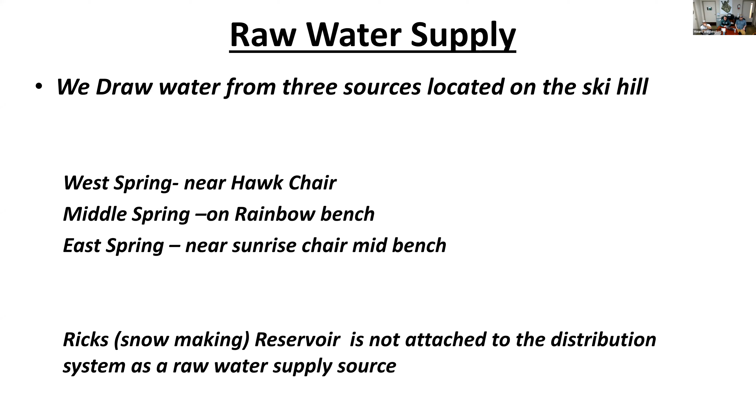For treatment, we currently UV treat and chlorinate our water prior to it being stored in our treated water storage tank. The treated water storage tank has a capacity of 500,000 gallons. During normal operation, the tank level is kept between 29.5 and 28.5 feet, with total tank height of 30 feet, so it only varies by approximately 1 foot during operations. Once it hits 28.5, the pumps kick back on and top it back up to 29.5 feet.

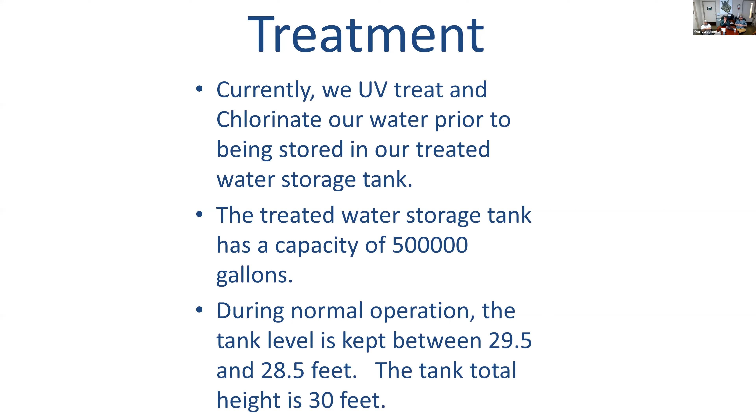So here's a map of our distribution system. You can see in the upper right-hand corner, that's the treated water storage tank, which is located just right beside the Marmot recovery facility. The blue lines trace the way the water will flow down through the resort.

As we're a gravity-based system, it starts at the top. It comes around the front of the Bear and Deer Lodge to the main lodge, but there's also a branch that spreads down and goes towards the general store and then feeds in through Dugan's lot into 799.

Those two lines pass through 799 with some spurs going out, making its way down towards Paradise Lodge, transmits directly down to Nordic Road, and then branches off both to the Raven Lodge and towards Beaufort Heights subdivision.

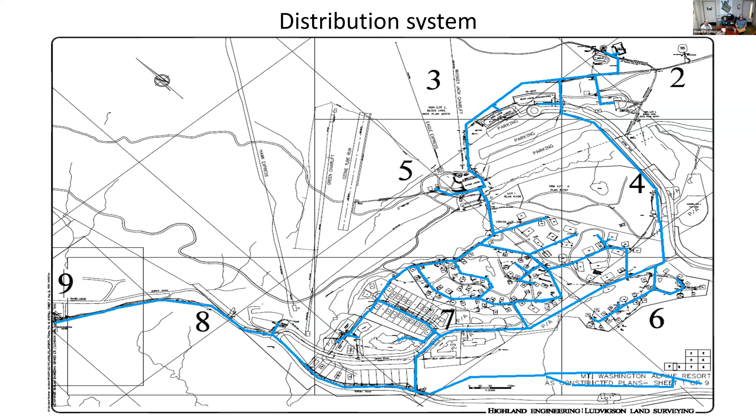So we're going to have a quick look at what we were experiencing for normal operations last year, and these are trending shots between November 16th and January 9th, 2021 that we're going to look through.

It's important to note in this slide that it's basically November 16th to December 1st. You can see the yellow lines are pump cycles, when the pumps kick on and off. The red line up top is the height of the treated water storage tank, varying up and down throughout the day. You can see the purple line, the middle spring line, how evenly it is. At this point, it's steady, sitting at about 67 inches deep right now in this shot.

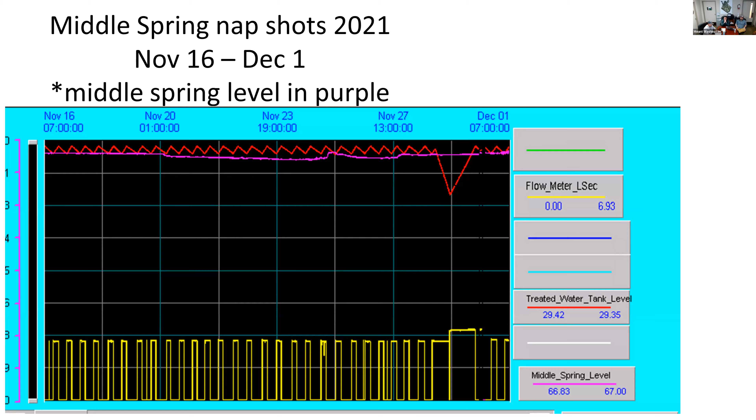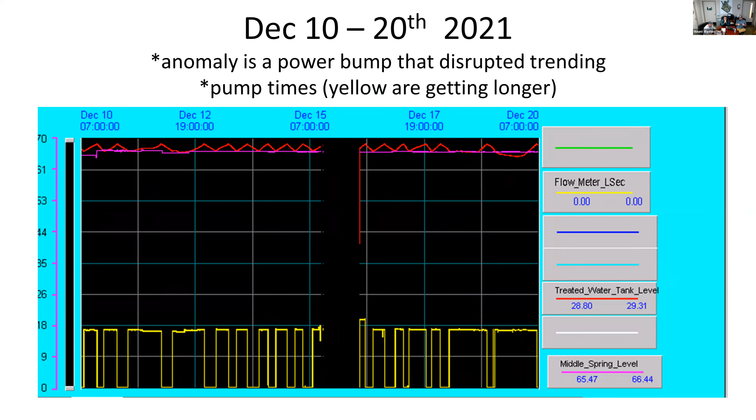December 10th to the 20th. Now you can see this is where the resort started to pick up pace as we're getting busier. You can see the pump cycles are actually longer, quite visibly longer. The treated water storage tank height varies. You can see the weekend dips as it goes down, and then it climbs back up over the nights, and drops down during the day, and we go through that cycle. That happens pretty normally.

This slide is December 20th through the 30th, 2021. This is the start of our main Christmas season. You can see the pump cycles are really long. The tank drops down and then it recovers overnight. What's important to note is that even though we started pumping 24 hours a day on December 26th, which you can see by the yellow line on the right-hand side of the graph, that's just a solid line going across, indicating we are pumping.

We started on the 26th and stopped on, I believe, January 9th, which would be the next slide. But go back, please. It's important to note here that the middle spring level is consistent. You can see all the way across that the height doesn't change.

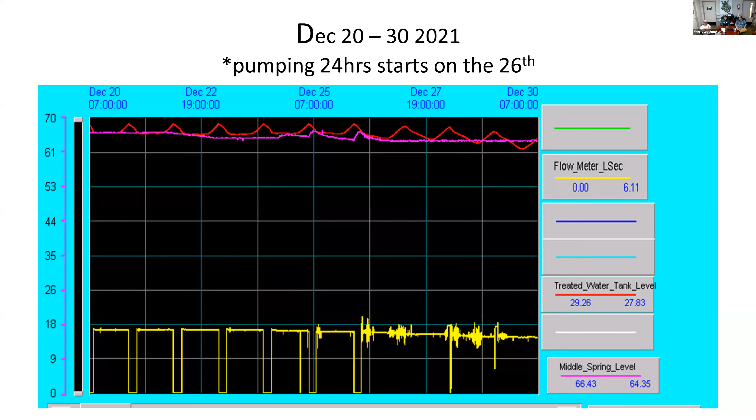So here we are, this is December 30th through January 9th, 2022. We have to notice that even though we are pumping 24 hours straight during this period, the middle spring stays level, all the way across. But what you can notice is the fluctuation in the treated water storage tank. During the day, you'll see the drawdowns, and the spikes up are an overnight fill. That pattern continues, and the tank got down to a low of approximately 25 feet during this period, which isn't uncommon for a busy resort. We're pumping 24 hours a day, straight through that week.

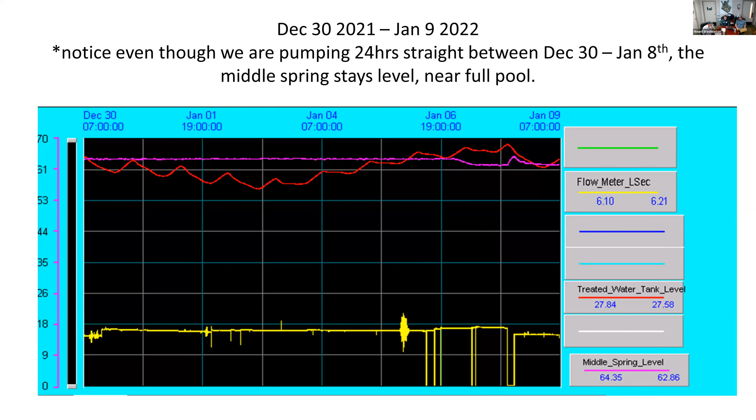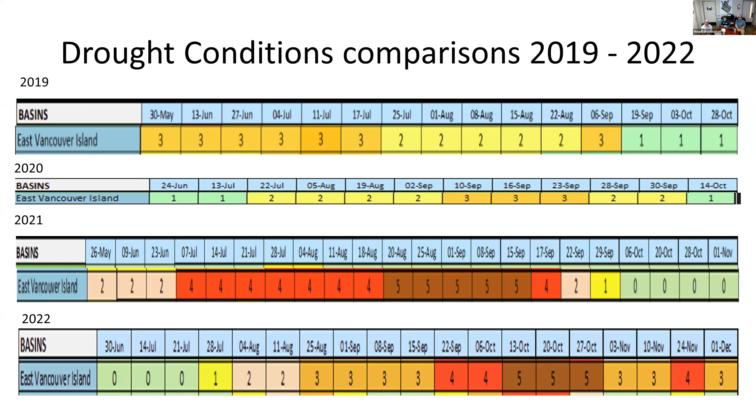So we're going to have a look at some operations from September 16th this year forward. This is what the concern was that caused a lot of issues for us.

On November 16th, we really noticed that the basin, you can see on the far left side of the chart, wasn't recovering between its pump cycles. It doesn't peak out above or equal to where it was. So what we did is we moved some water that we had in the East Spring that we could take, and we were able to pull a partial fill from it, which allowed the middle spring to start to recover. You can still see the line bouncing up and down, troubling, but it's still within a normal pattern.

But on the 21st, you can see around the 20th, 21st, that pattern changes dramatically, where the refill rate after a pump cycle was not strong enough. So essentially, what we were pumping into the distribution system was way more than we were being recharged in our raw water sources. On the 21st, we actually contacted Island Health to discuss this with them, and immediately following that, we started looking for alternate sources that we could pump from. While we're doing that, you can see where we're getting alternate sources approved. You can still see the downward trend of the height of the middle spring, and that's important to notice because that's not usual from what we normally see.

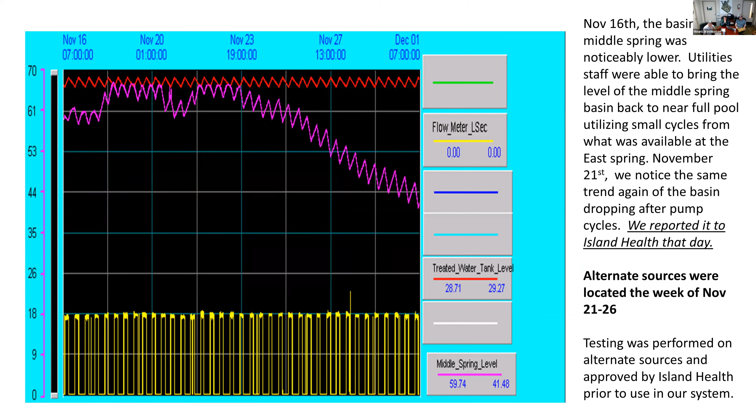So this is December 1st through 13th, 2022. The screenshot was actually taken this morning. On this chart, you can see right after December 4th, the next line forward is December 5th. It was in that period that we got the okay from Island Health to use the water from that alternate source. It took time for the test to be approved and then the okay to be given by our health officer to use that water in our distribution system.

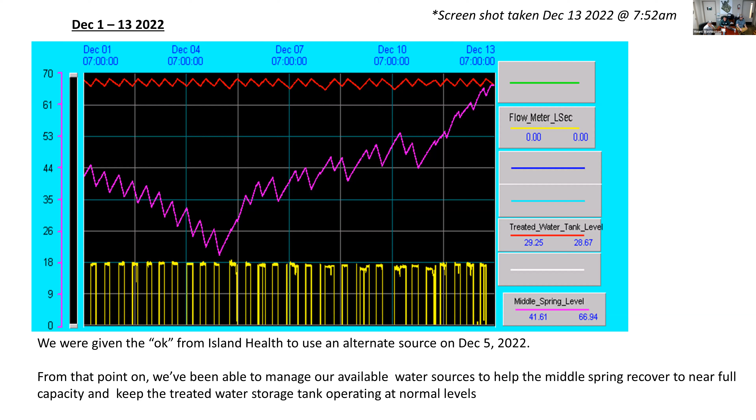Once we had that approval, we were able to supplement the middle spring, or sorry, the East Spring water with this alternate source, and we were able to give the middle spring a break per se. You can see how much we started to climb. So this week we've been diligently at it, making sure that the middle spring is still climbing. We wanted to reach as much water as we could in that source prior to the Christmas break starting.

So here's some resort usage numbers in comparison.

Now on the left is 2021 November. You can see the average usage isn't very high. There's an anomaly at the bottom where we had a water line break on November 30th at unit 94, and that's why there's high consumption on those two days. But you can still see how low the consumption is at normal, throughout the month. And yes, those numbers are cubic meters of water.

Then as we go through the month of December, you can see the usage starting to increase. What's highlighted in those Excel spreadsheet numbers, the 26th to the 9th, is the period at which we will pump 24 hours, and that's what we cannot do this year. We cannot have 24-hour pumping cycles for multiple days in a row, so that's what we're trying to avoid through water conservation and ongoing efforts right now.

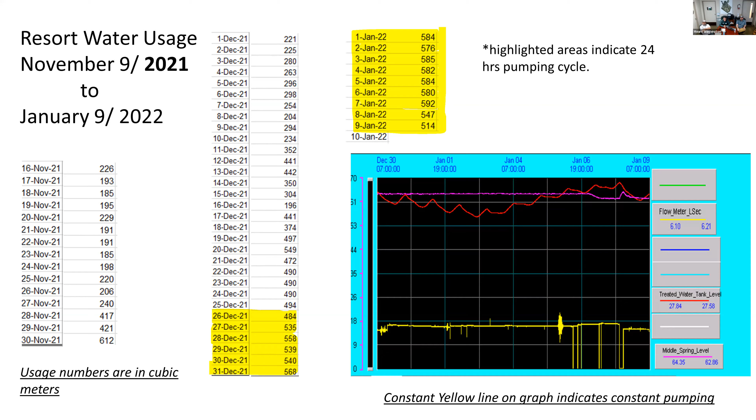Here's a comparison, a simple chart of the resort usage November 16th to the 1st. Once again, you can see how low the water usage is on your left, and those numbers are in cubic meters. But even though the usage is low, you can still see how much it's diminishing the capacity of the middle spring itself. The jagged purple line is the water going down with every pump cycle.

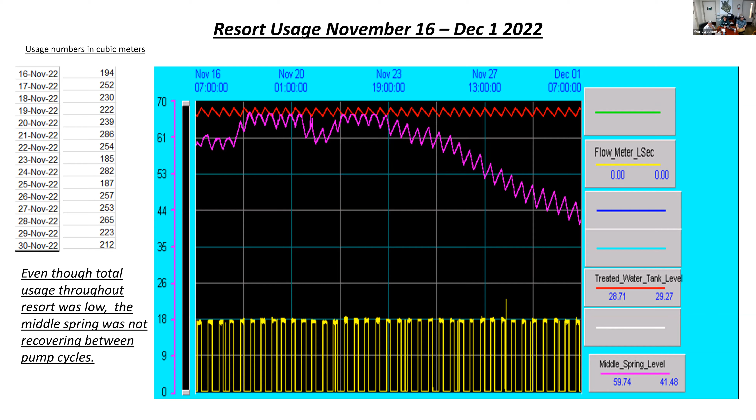Here's our resort usage December 1st to December 11th. I believe we got the notices out between December 3rd or 4th, and you can see that coincided with our ability to use an alternate source. From that point on, we've been able to manage. We're still using a lower amount of water right now, but conservation efforts are still important because the middle spring has not reached full flow yet.

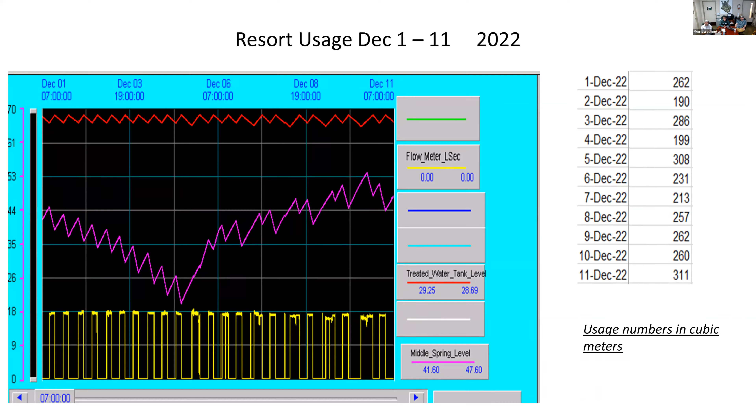We had a question: why was the water conservation measures set out in December rather than earlier? We had heard rumors there were water shortages in October. It's not unusual for the mountain to go through dry periods through the fall. If you're a resident up here, we quite often see those dry periods leading into typically early October. The East Spring typically runs dry in the summer months, and the Middle Spring this year did not show signs of reduced flow until approximately mid-November. Once we started seeing those reduced flows and weren't meeting current demand, we met to discuss courses of action. We contacted Island Health and put together a conservation notice that we sent out to the public.

Here we have a question about the potential of a boil water advisory - what would trigger one? Essentially for us, there are two things that can do that. On a bi-weekly basis we take our samples down to Island Health and they do the test; we don't do our own testing for water results. If one of those tests didn't pass standards, with a high coliform or fecal count, we would immediately go into a boil water advisory and they would contact us to implement that. The other thing that can trigger it is if we have a turbidity reading, an NTU of 1, for a 24-hour period. So if our incoming raw water hits a turbid state, we would have to call a boil water advisory as well.

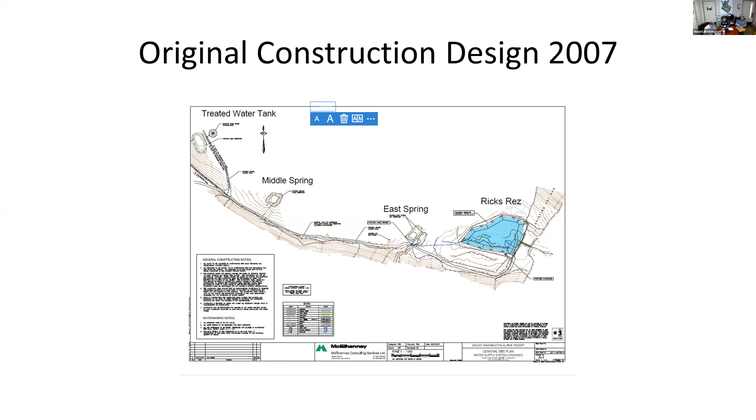When we needed fire flow, it was to be pumped to the treated water facility and then into the treated water tank via a small pump house located just off the Rick's Ride side of the run. For this purpose, you can go ahead and change the slide there.

Everything was done to appease all of the governing health, safety, and legal bodies at the time. We consulted with and got full reviews by all of the above documents—there was much more. I just included those for a bit of an overview, to give you an idea of what we had to go through: Fleener and Associates environmental geotechnical reviews by McElhanney Consulting Services.

We needed approvals by the Ministry of the Environment, the CVRD, Land and Water BC, and Island Health. Only then could we even get a shovel in the ground. Once we did, the project was completed by Uplands Excavating under the supervision of McElhanney Consulting Services.

So everything was done to appease all of the governing health, safety, and legal bodies. We consulted with and got a full review from regulatory agencies.

After the initial construction and filling, the water was deemed too turbid for domestic usage due to the nature of the clay layer lining the bottom of the reservoir. Also, we exceeded some MAC levels on metals like aluminum and barium. So the water was not approved by VIHA or the provincial comptroller as a potable water source. This water could only be added to our utility for emergency purposes, and likely a boil water advisory would have to be implemented. So even though it met all requirements as an emergency fire flow reserve, it was never put into our potable system.

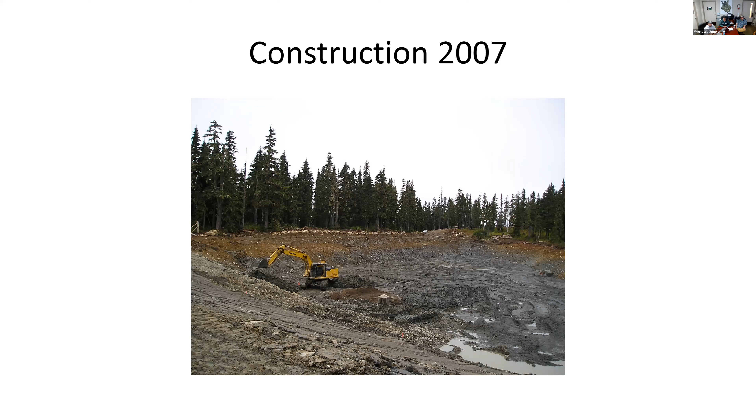That basically lasted between 2007 and 2019.

In 2019, PGRI, the new ownership group, decided an investment was going to be made into snowmaking, and Rick's Reservoir was the best candidate to be expanded and utilized as the water source for snowmaking. Again, a hydrogeological assessment was made, and a seismic refraction survey from Frontier Geosciences was conducted. McElhanney Consulting Services oversaw the whole expansion process, and the reservoir and pump house construction was done with the engineering firm Ridgeline. It was at this time that we changed the water licensing of that reservoir from potable to industrial snowmaking.

You can see there, that's during the construction of the pump house, and underneath that clay area is the intake. When full, the reservoir now holds an estimated 5 to 6 million gallons of water, and it's filled naturally by surface runoff and a groundwater source in the back northwest corner of the bank that only flows when the East Spring has water and is overflowing.

During snowmaking, we have never diverted water from the East Spring into Rick's Res, and this year was the first year ever. We have documented photos from about August 18th or 19th showing that water stopped flowing into Rick's Res. It's the first time we've ever seen water stop flowing into the Res.

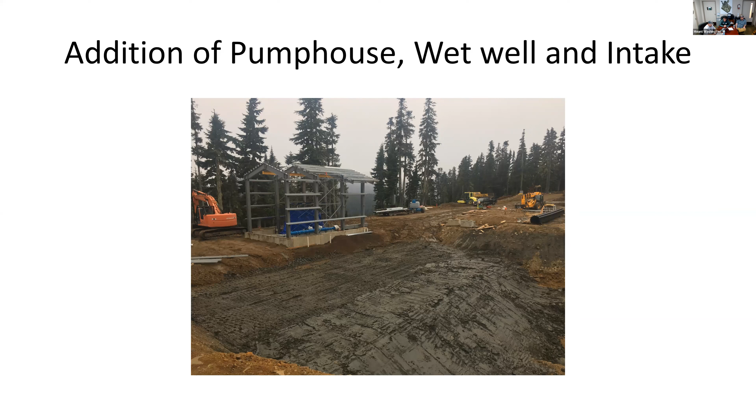In a normal year, when we don't use any of the water for snowmaking and the reservoir is full, the water comes into the backside — there's a little snowy patch up there. That's kind of the area where the water trickles in over the bank into the reservoir. It just overflows into Ramparts Creek.

This is basically the condition 99% of the time, unless we drain the reservoir for any reason. The reservoir is full whenever there's natural runoff or the overflow from the aquifer flows into Rick's Res, and it just overflows into Ramparts Creek.

It takes a lot of water to make snow. Just to give you an example of the refresh rate of Rick's Res: last year alone, during the winter, we used almost 11 million gallons of water. The reservoir only holds 5 to 6 million gallons, and we used 11 million gallons in about 4 months. So 4 to 5 million gallons of refresh in the winter, even during winter temps, refilled that reservoir.

After we were done making snow, all the remaining water that kept refreshing that reservoir just overflowed through those overflows into Ramparts Creek. On another note, it's a misconception about snowmaking that we're actually consuming the water — that's not true. You don't consume anything; it's just taken from one source and put into another source in another form. It's a convenience for us that we put that snow back into our own watershed, so it then seeps through ground and surface runoff back into our own watershed to be used at a later date. It does not get consumed, just repurposed.

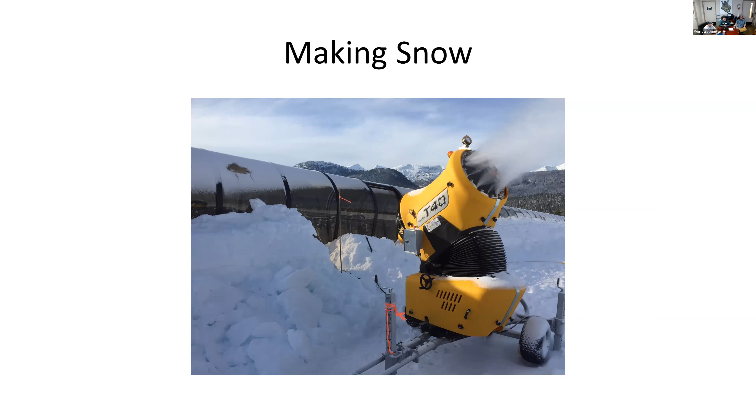That's basically all I got. Okay, thanks, Dan.

Just going to go into a few other things. I believe in the water conservation notice we sent out, we highlighted a few things we're doing. There's probably more to that now, at least at the resort level, about shutting off water stations.

We're encouraging all of our staff, and we can see staff every day walking around with their own jugs of water for their departments and themselves. In food and beverage, we're using disposable or compostable plates and cutlery. The majority of that is biodegradable and compostable product, so we're trying to be environmentally friendly even though there is additional waste.

But that really helps us from a dishwashing perspective. Lots of water gets run through the dishwashers and we're trying to avoid that at all costs. Same with regards to draft, not using our glass washers.

So anything you'll find up here is going to be in a bottle or can product form. We also won't be using our fountain machines up in the cafeteria, since it uses water to mix with the soft drink syrup, so it will only be bottled product available. Coffee machines right now are looking to be converted to use bottled water, so they'll be off the resort source and only used with bottled product. We're working through that right now.